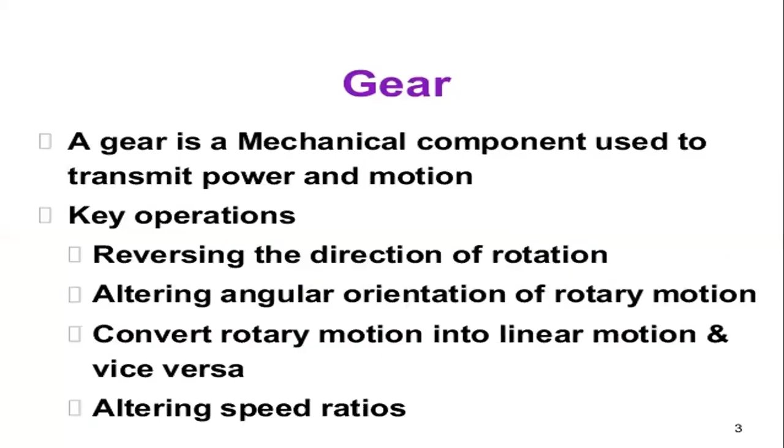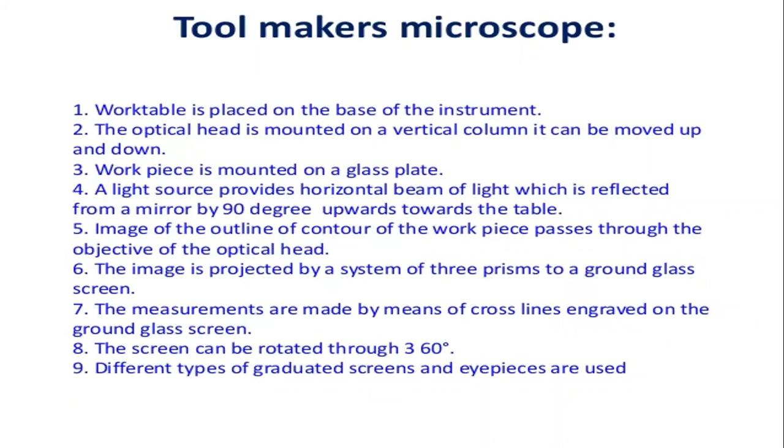In this screw thread measurement, we are going to see the three-wire method today. The three-wire method is the accurate method in screw thread measurement. In this method, three wires of equal and precise diameter are placed in the grooves at the opposite sides of the screw. This three-wire method is generally more accurate than any other method.

In this method, the wire on one side is fixed and two wires on the other side are used. The wires may either be held in hand or hung from a stand, or you can use a clamping section, where the wires can be clamped.

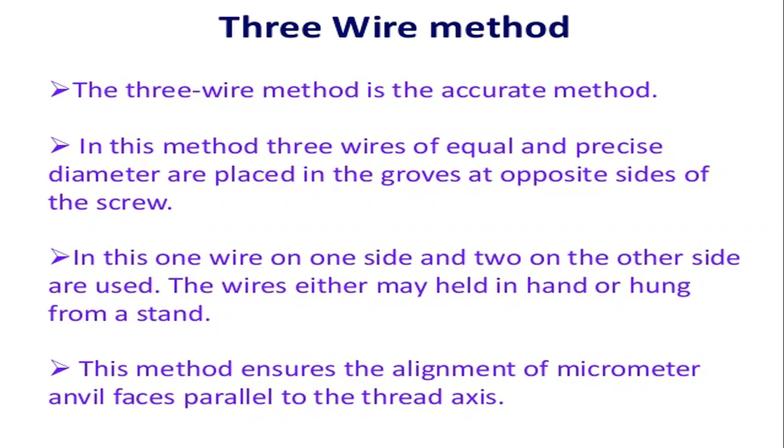In the picture, you can see the three-wire method. A screw thread is taken and you have to put the three wires: one on the upper end, and two on the lower end of the section, fixed.

Here we take S as the total length, that is the diameter of the rollers plus the screw thread. P is the pitch of the screw, and the diameter of the wire is taken as small d.

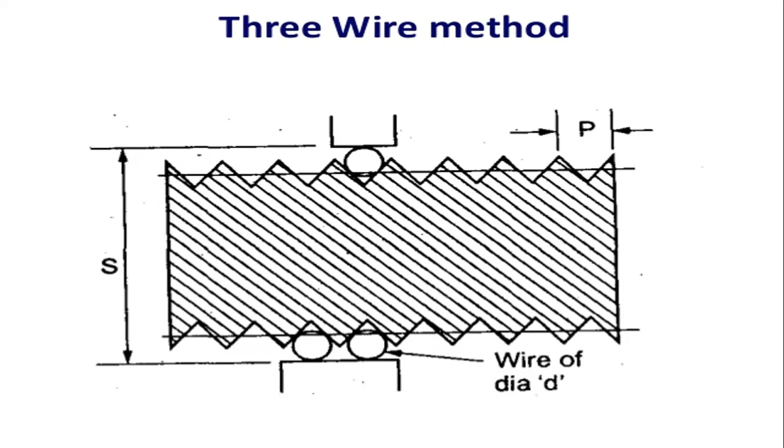Then we move to the next point. This method is more accurate than the two-wire method, as it ensures the alignment of the micrometer faces, which are parallel to the thread axis.

These micrometer faces are parallel to the thread axis.

Here, three wires of exactly known diameter are used, so the three diameters of the wires are equal in size, and they are fixed: one on one side and the two other wires on the other side, in two different ways.

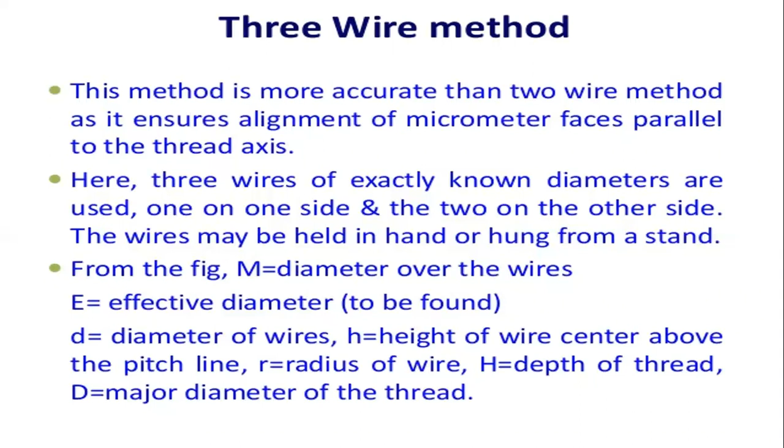There we can see the effective diameter of the screw thread. This is the effective diameter and the pitch conditions of the method. In the picture you can see the brief section of the measurement of the screw thread.

Here you can see the capital E, which is the effective diameter of the thread, and M is the measurement from the total two wires. Here M is taken as the length of the wires section also.

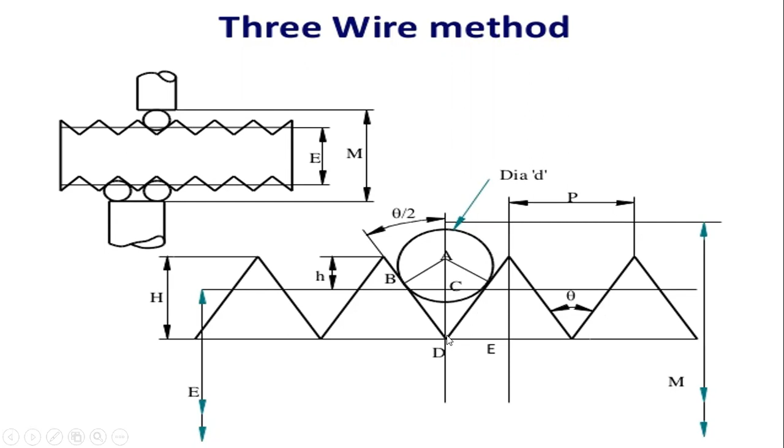So here CD is taken as the length from the chord to the root point of the section. That is, CD is equal to capital H by 2, that is P by 4 cot theta by 2. Further, we need to take the small h value.

We should take h equal to AD minus CD. That is, AD is d by 2 cosec theta by 2, and for CD it is p by 4 cot theta by 2. So those are the two sections.

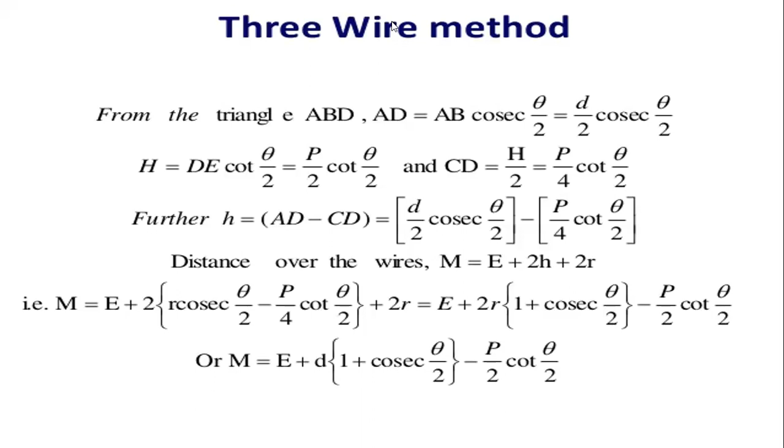Next, for the Whitworth thread, theta is taken as 55 degrees, and depth of the thread is taken as 64 percent of the pitch, that is 0.64 times the pitch.

Hence, by substituting the values in both conditions, that is E is equal to D minus 0.64 P, that is the pitch, and cosecant theta by 2 is equal to 2.1657. So the value for cosecant theta by 2 is 2.1657, and cot theta by 2 is equal to 1.921.

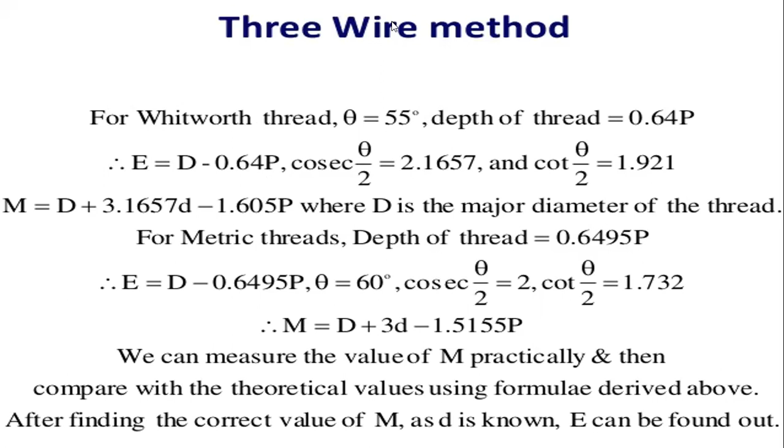Next, this is the best size wire method. So we are going to take three wires, but we are going to make the assumption for only one wire, that is the best wire size. So you can see the best size of wire method in these conditions.